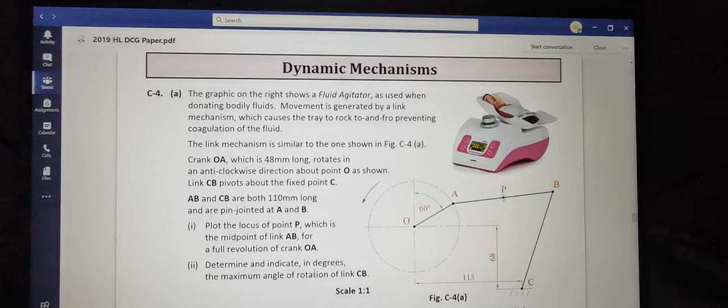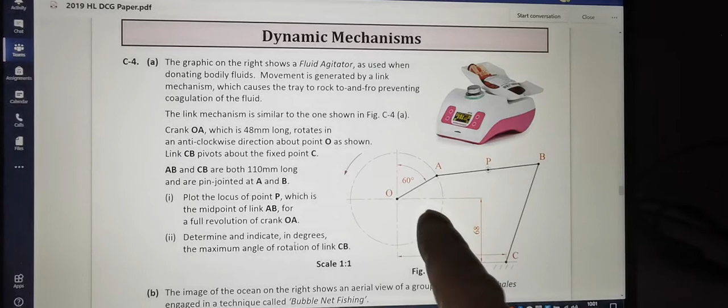Okay guys, gonna have a look here next at this dynamic mechanisms question from 2019 higher level. So we can see that OA there spins around anti-clockwise, and C is fixed and B is a pin joint and all that. So I'm gonna set that up there quickly.

Okay, so I'm just gonna start this off here with a line for the ground. Now we know the center is up 68. And the radius of that is 48. So I will just draw that crank or rotating link there first.

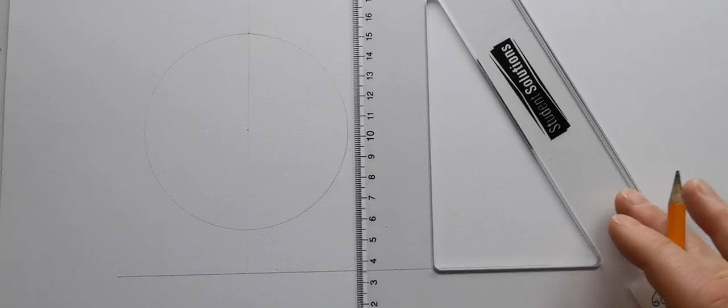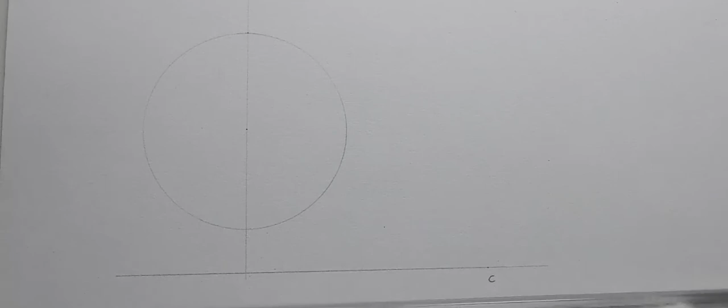Now, the next thing we know is that over 115 horizontally from the center, I'll just heavy that in a bit. So over 115 is C. And I'm going to just mark 110 here now for setting my compass. So don't set your compass off the set square. So that's 110.

Now the next thing we know is that the link here is at an angle of 60 to the vertical, which is 30. So this is the center O, that is A. Now, we know then, I set this to 110. So we know that from C to B is 110, and from A to B is 110. So that, and our point P is in the middle of this, which is 55.

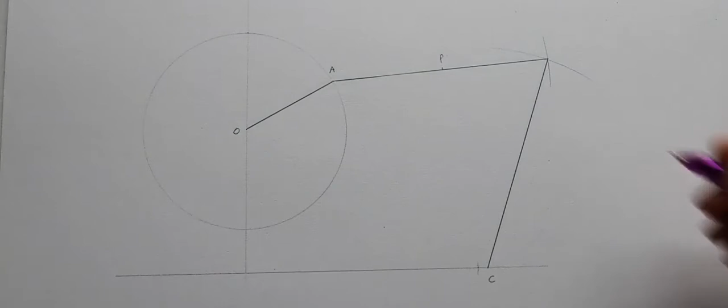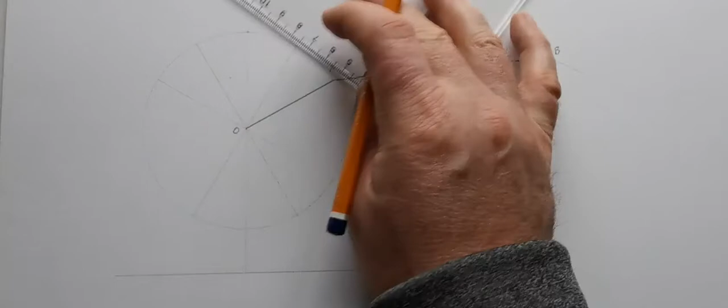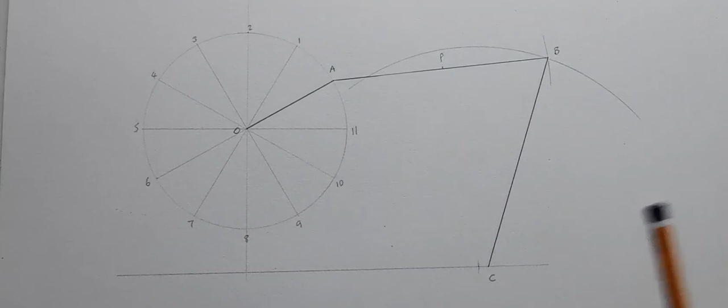So that's our setup, and I would heavy that in pencil. And I'm going to break up now this rotation into 12 equal pieces to allow us to drive on. And just to make life easier, I'm going to number this. So now, I suppose the thing to know there now is because C is fixed, C can only swing over and back, so B has to stay on that arc.

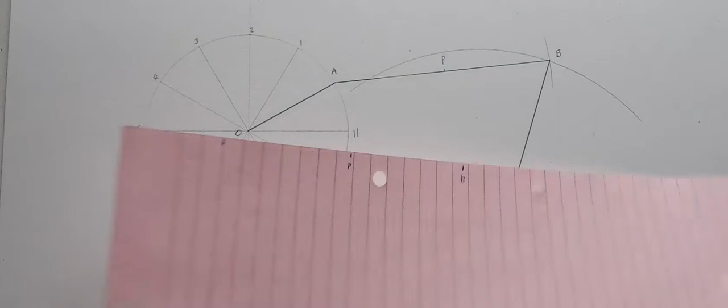Now there's two ways I could do this. One way I could do it, and I think it would be okay to do it, is if you just got a piece of paper, you marked in A, B, and here's P. So if A goes to 1, B has to be on the arc here, and that's my location for P. Now I could just go along and mark all of them, and that's going to give me all the locus, and I could draw them, but that's using a piece of paper for the locus.

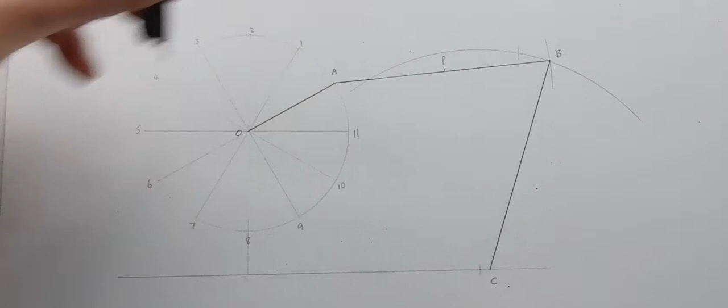I'm going to use the construction method with compasses instead. I prefer it. So first of all, if A goes to 1, it has to stay 110. So I'm going to just draw these one by one now rather than marking lots of them. I know it's a little bit slower, but so if A goes to 1, B must be here, and there we have it at 55. So that's P at position 1.

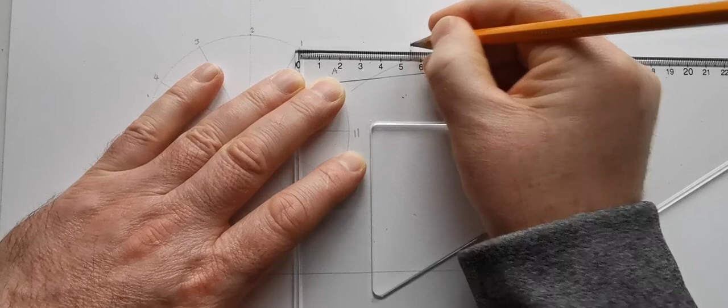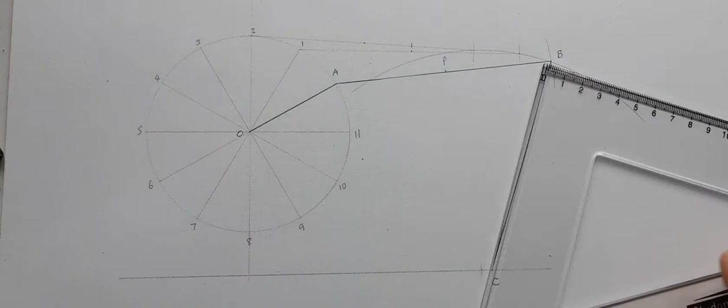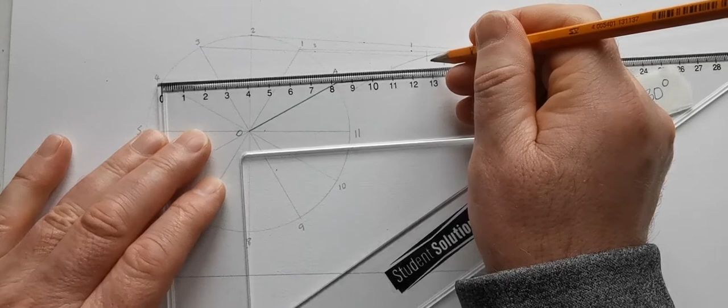So then it moves on to 2. So there's the link, and there is 2. So we can see our other method there was perfectly accurate to the millimeter as well, and so on. So I'm going to just mark there 3 and 4. Going too far ahead of yourself here is not a good move. So there's 3. And 4.

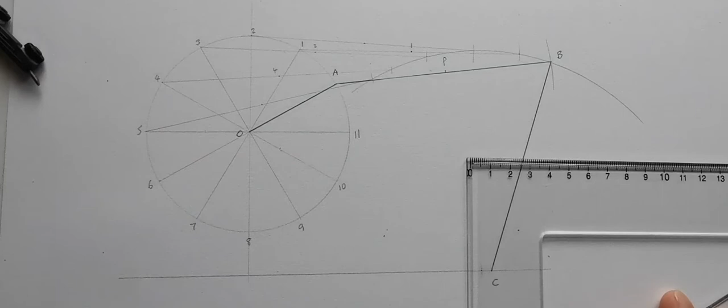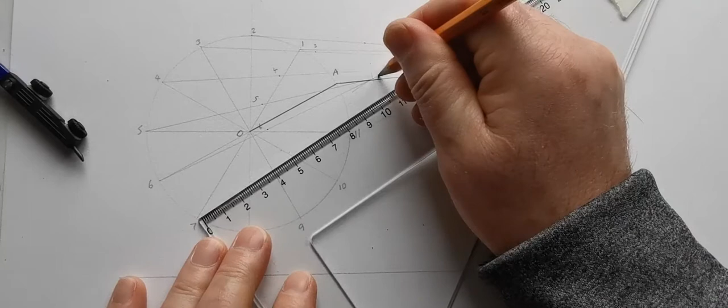So I'll just do these one at a time now, because at the end there it's easy to get confused when it's just about to start going back in the other direction. So there's 5. 6. So it's just better to go slow and not screw it up than to mess it up and try to figure out where you went wrong. So here's 8.

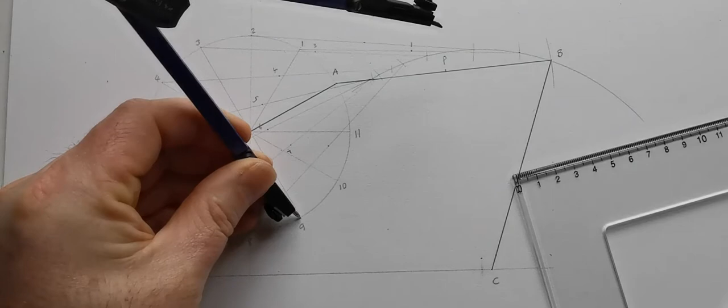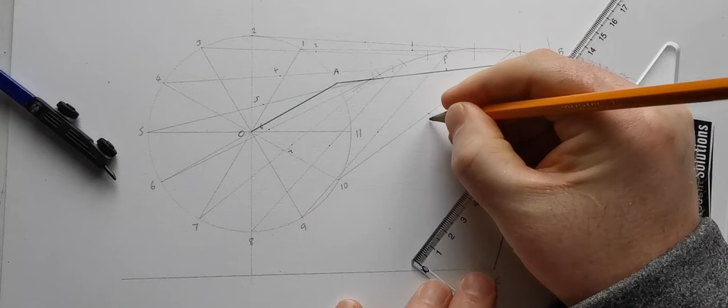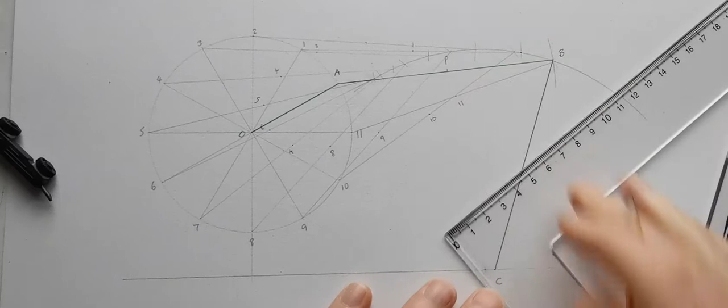So halfway is 8. 9, 10. And 11. Okay, so that's all the points I need for the full rotation.

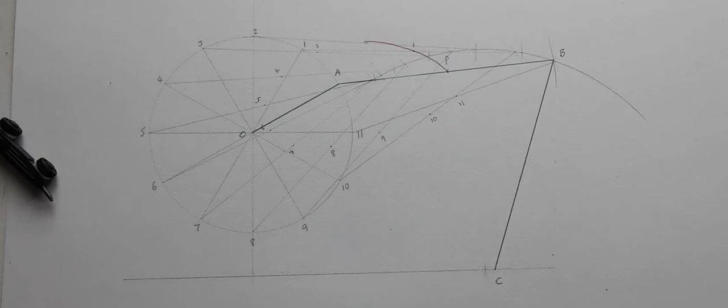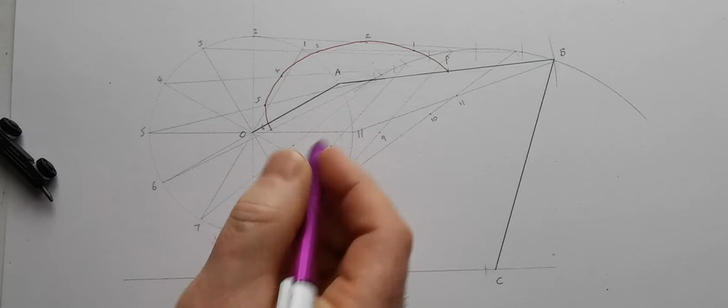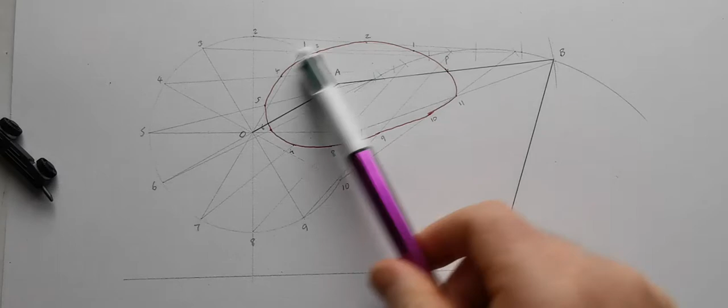So I'll just grab a red pen. So that's 2 here. So it goes from P to 1 to 2. I'll just number 2 there. I forgot to number 2. Okay, so that there is our locus. That is the path of P as it spins around.

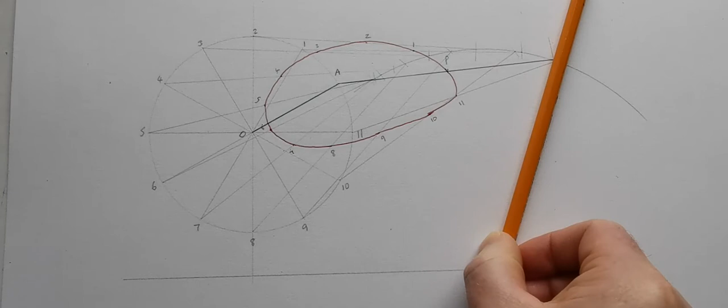So the next thing there then, they asked to plot the locus of P, which is the midpoint, for a full revolution, done. Determine and indicate in degrees the maximum angle of rotation of the link CB. So what they're saying is, what's the furthest right to the furthest left here? What is the maximum angle for that? Okay, so as that spins over, we know that's the furthest it goes in one direction and the other one. So what is the maximum angle?

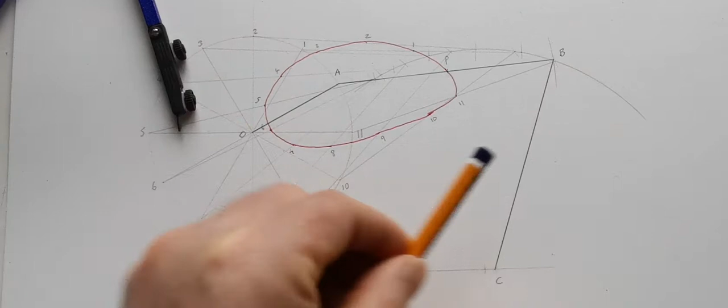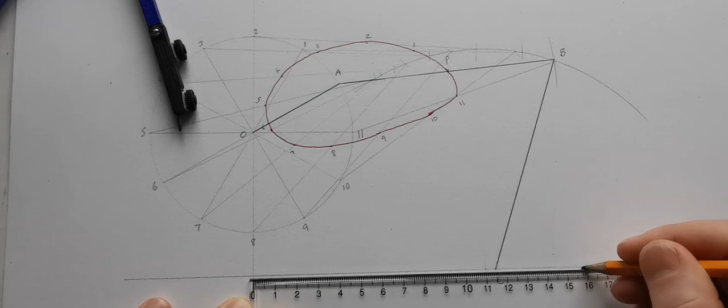Now, I suppose it's tricky enough in a way, but as this link OA swings around here, what is the furthest right that B can go? How far to the right can this be? One way you can find it is if that's 48 for the radius, and we know that AB is 110, so if the OAB link was straight, it would be 110 plus 48, which is 158. So I could either mark it here, so that there would be 158. So if that entire thing was straight, that's where it would be.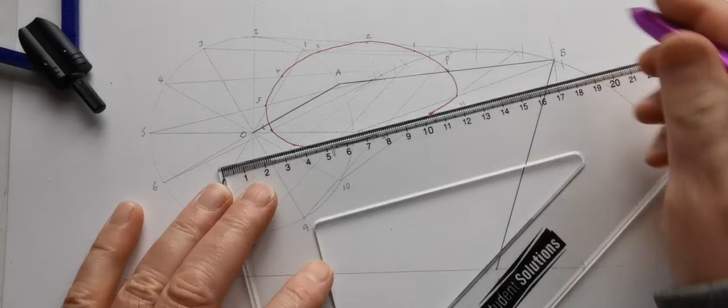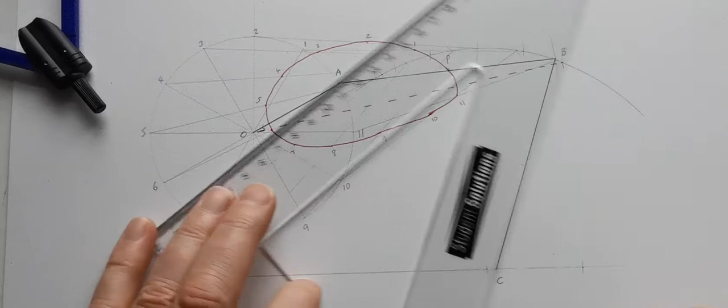I think I will just put this in dotted there just to help you understand where this is coming from. Okay. I'll keep it in green now, I think. So that would be the furthest right that B can go. So I just mark that with a dotted line down here. And again there then, the furthest left that it can be would be an extension of that to the other side through the center.

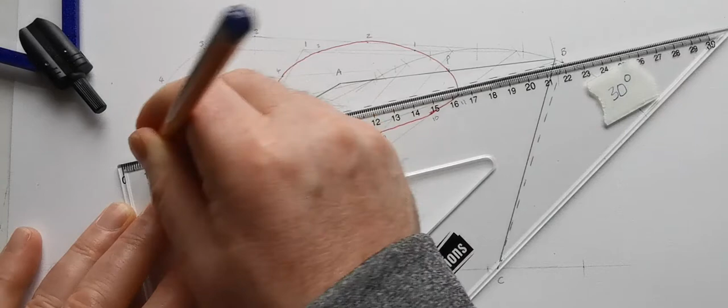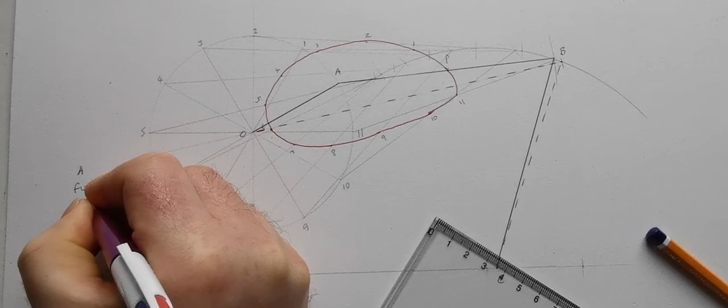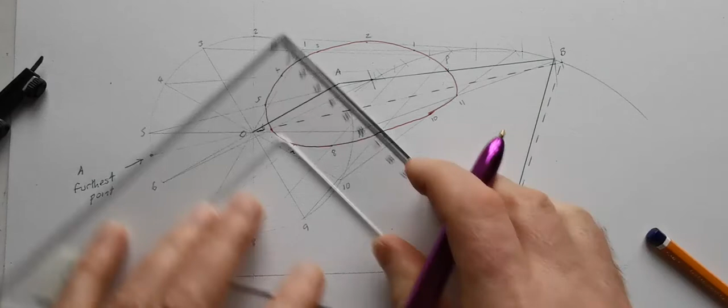So if that had flipped right around there, that would have A over here, and I'll just say that's A at the furthest point. And since we know that AB has to be 110, when A is over here, I'm just marking that there, this is the furthest it moves to the left.

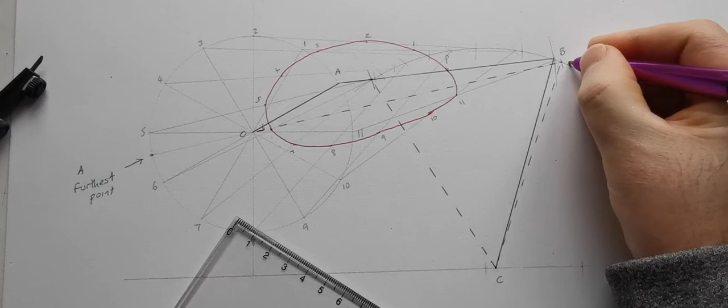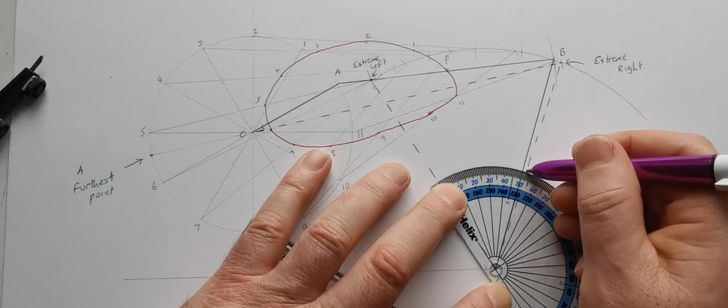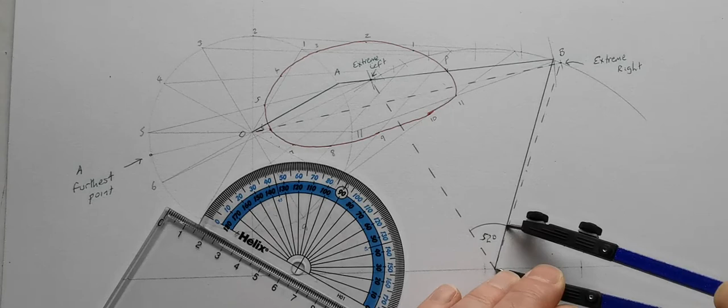So the extreme right is here, and that point there is the extreme left. So the angle here then, if I could find the protractor, 1 second now. So our angle there is getting 51 to 52 degrees. So 52 degrees is the maximum angle of rotation. So I'll just put in a little arc there to show that. Now that is that question answered.

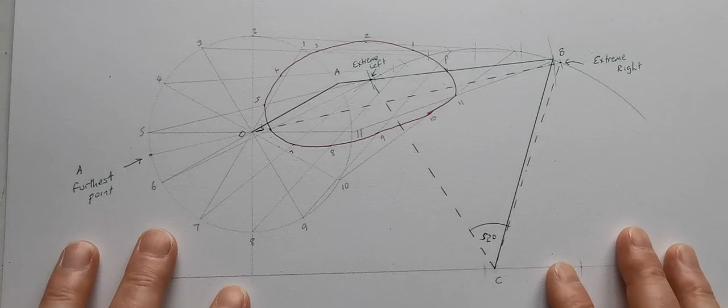But I just want to have a look here at something that comes up every now and again, and that is if you're asked to put a guard around a machine. We weren't asked to do this, but I'm going to put a guard around the machine here so that we can have a practice go at it. In theory you could just draw a huge box around it, and I suppose that would do, but I'm going to use a colouring pencil here. To have this looking well, I'm going to keep the guard maybe 20 mil outside of most of the moving parts.

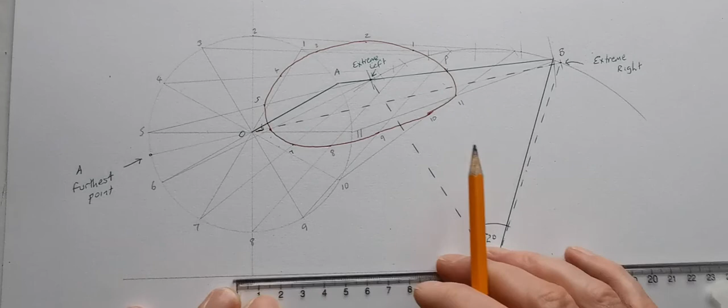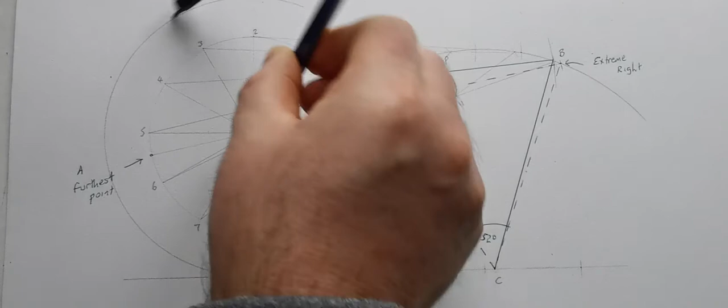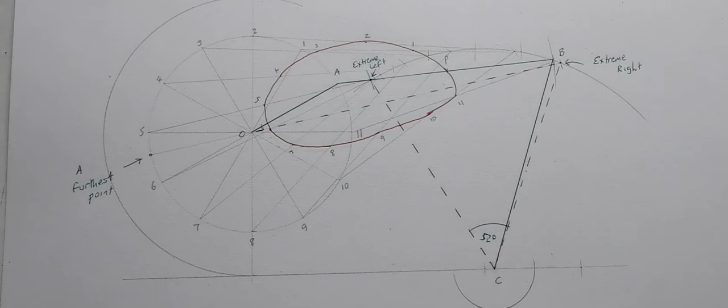So I'll just measure it here. Okay, that just happened to work out at 20 mil. So I'm going to set my compass to 20 mil, and put a guard 20 mil outside of that. If I wanted to stay 20 mil outside of C, which doesn't move, and B above here is my extreme point. I'm going to choose a colour for this; I'll just use a different shade of green.

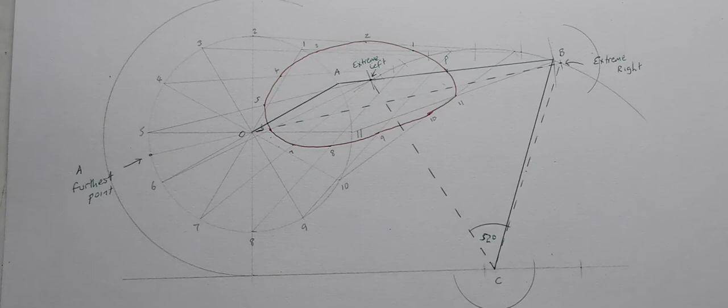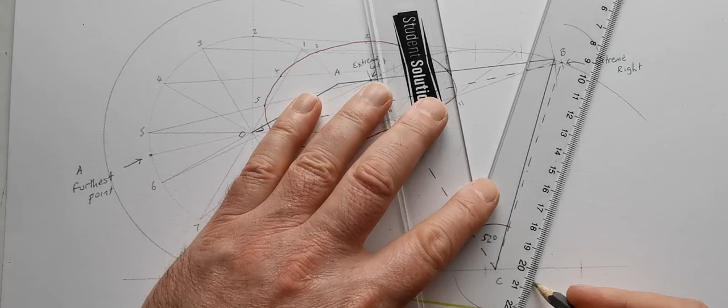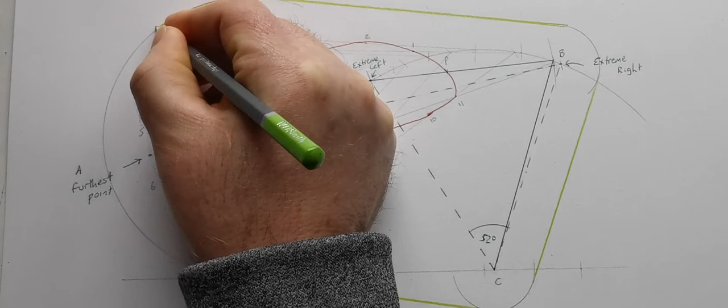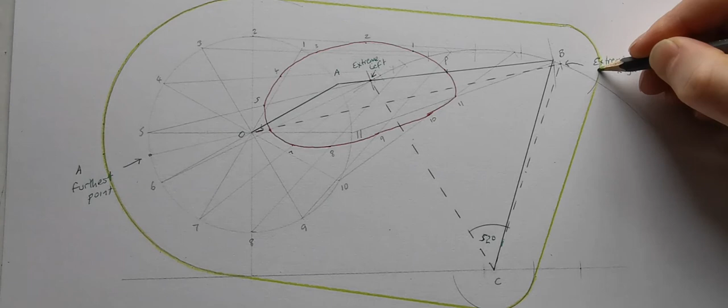So I'm going to just put a tangent. Now you don't need to do a construction for this really, but I'm going to put a tangent there, and another tangent between these circles here, and another tangent across here. This is not usually the greatest idea, doing freehand circles, but I'm going to just complete this. And I'll just highlight that the green is a guard.

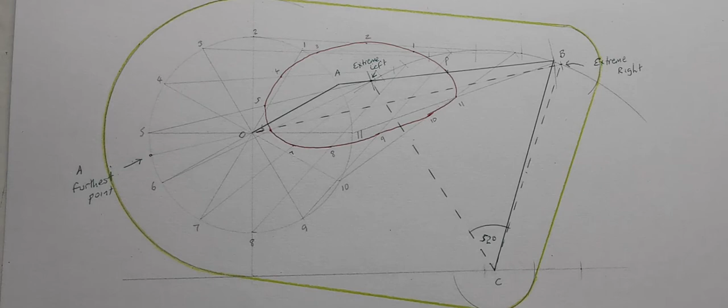So there's no absolutely perfect answer, but that gives roughly the same amount of clearance all the way around the moving parts. So that's something that comes up now and again, and it's something that you should be aware of. So that is 2018, the linkages question.